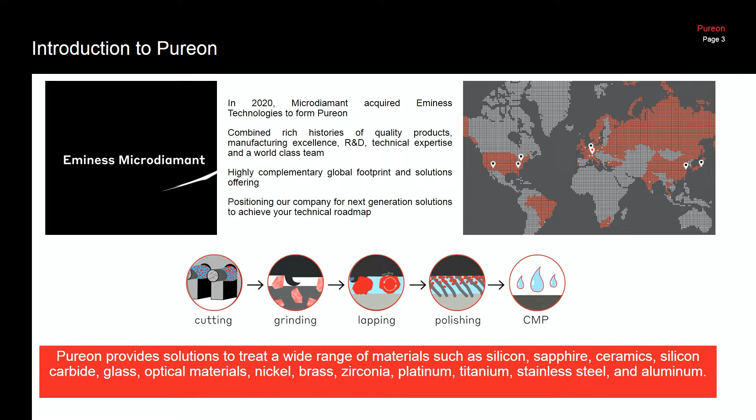So only one slide about us, who we are. Company Pureon is a merger of two companies, the company Microdiamant and the company Eminess. Microdiamant still is main manufacturer of diamond micron powder and especially the so-called polycrystalline micron diamond powder. And we are a manufacturer of the product that I want to talk about today, which is the Squadro. Looks like this. This is a diamond grinding wheel, tile, pad, however you want to call it.

Eminess is a very important part of our company today because they are the ones who have all these colloidal polishing materials and as well the pads, what you need as a support. We are covering many process steps. This means from cutting, sawing, wire sawing, as well grinding. We will speak about grinding today, but as well we are involved in lapping, polishing and CMP. So this is more the part of former Microdiamant, and this is covered by products from former Eminess.

And what is very important, because we are using diamond and all these chemicals, we can work on basically all materials that you can imagine. Why? Because diamond has the hardness, but as well the chemical composition and compatibility is there. So I want to speak about the glass only, but we can work on so many other materials which we see in the semiconductor industry. But okay, let me continue.

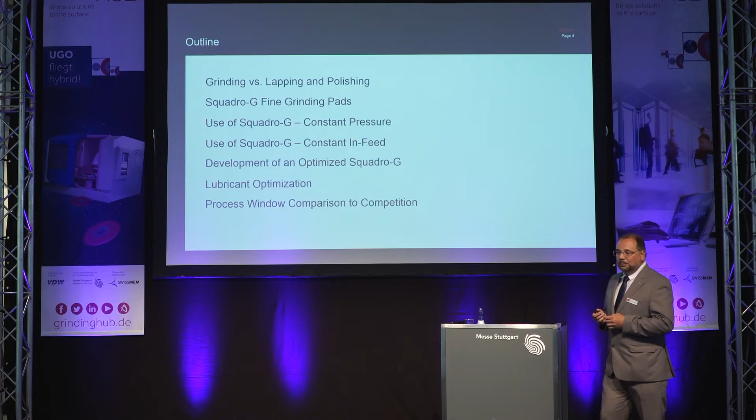So a brief outline about what I will talk today is some little theory. You know what is grinding and lapping, but I will briefly talk about it. And then about our product and how to use it under different conditions. Very interesting. And then we have some internal results that I want to share with you, these two parts, and in the end to show you what is the process window of the product.

So theory, grinding, you know, this is if you have a support where you have the abrasives fixed on it. Very simple. And the abrasive material can be anything like diamond or silicon carbide, aluminum oxide. It's fixed, that's important. And here for the lapping, you have loose abrasives. You can have rigid, stiff supports as well. This is a powerful process, but the particles get stuck into the support only in situ, just interim. The polishing is a bit different, but lapping and polishing are more close. Here you have, for example, a pad, a carrier, let's say woven pad, a Velcro, or maybe polyurethane pad that absorbs the particles, but it's again loose particles.

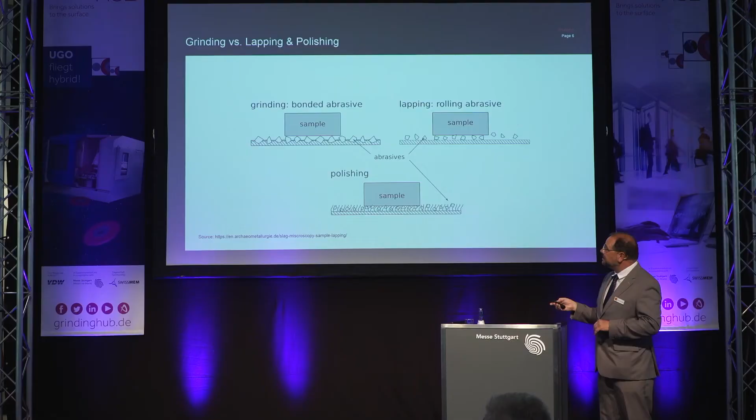Look a bit more closely into detail of grinding. Here you see something very important too, that our product has multiple layers of diamond, not only one. So this means we can wear it down, refresh it, dress it, use it constantly. And there are two main important aspects. How to use it best is the downforce, of course, so specific pressure on the workpiece, and as well the circumferential speed, grinding velocity, or platen speed, and we will see there are different speeds. It's not only one speed.

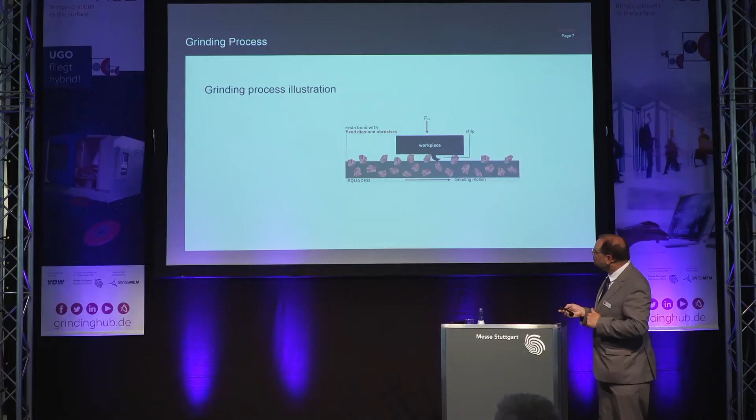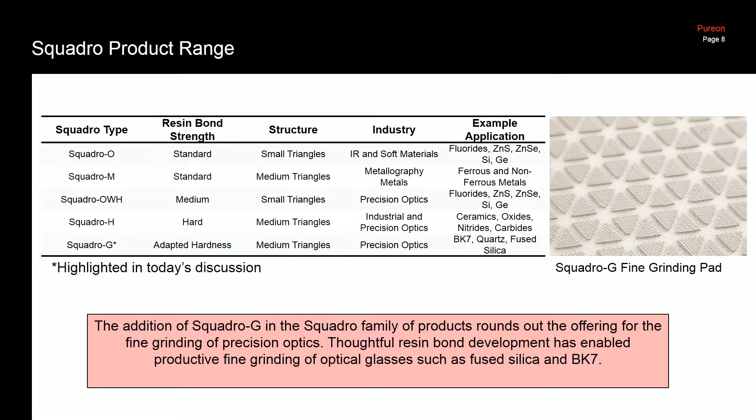Let me give a brief overview of this product family. So it's not only one product, but they are dedicated to specific applications. So we have a Squadro O, M, OWH, H, and today we will mainly speak about the Squadro G, but what is different? So the O stands for optical industries, where we work on softer materials, and we can use it on calcium fluoride, zinc selenide, zinc sulfide, and others, silicon, germanium. The M stands for metal. This means we use it for ferrous and non-ferrous materials, metals.

And you see the bond, these are the same, we say standard, but it's a rather soft bond, which enables a very gentle preparation. For these materials, it's very important to not be too powerful, to have the right level. For the optical industry, we have a specific setup where we go a bit stronger, depends on the size of the workpiece and the setting.

Because we are a manufacturer, we choose as well the design of the product. It can be small, large, and so fitting to the size of the workpiece, the size of the machine, diameter, and everything. The Squadro H stands for hard, because we have a very hard and powerful binder. This is for heavy-duty applications, typically for ceramics, oxides, nitrides, carbides, as well for the silicon carbide industry, but that's another story.

Today we speak about Squadro G, and this has some adapted hardness. This means as well very strong and powerful, but it's adjusted typically for glass applications, so that we take into consideration what the glass type is, that it works best. In the market we mainly see BK7 and quartz glass, fused silica.

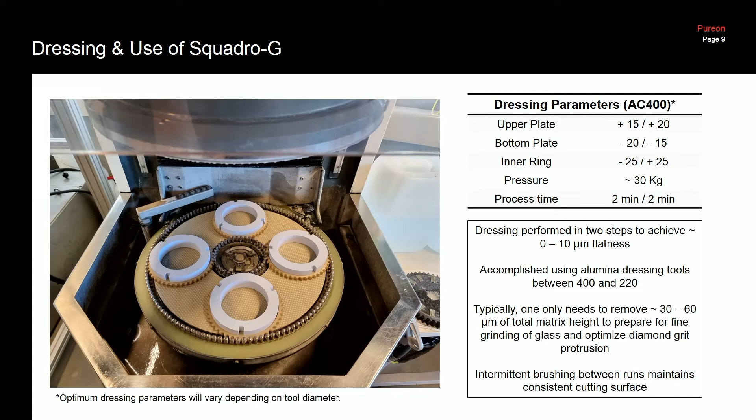And we do this by using aluminum oxide dressing stones, but we do it in a very, very gentle way. These are some numbers that we use. You have different plates, upper plate, bottom plate, and the sun gear, the inner ring. 30 kilograms means very little pressure, and 2 minutes is not too long. I spoke to other people who said it's very long, but that refers to diamond wheels, because we have another product with a resin bond. But still, all these values are low. This means we gently dress and open up the product.

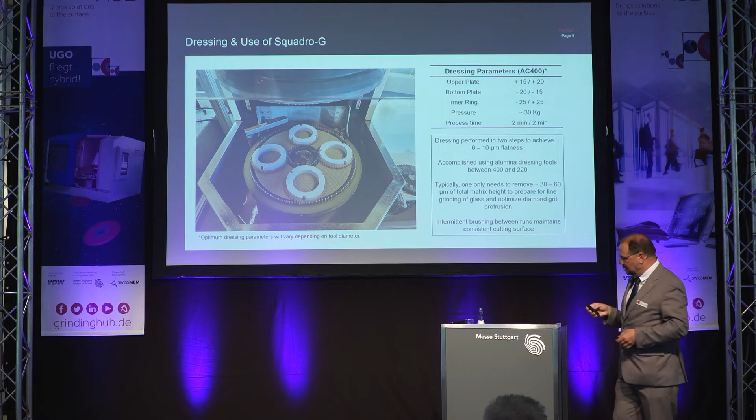And then we end up with a flatness and parallelism as well in the range of, let me say, 10 micron. You need to do this once to start with the product correctly. After that, you should not do it again and again, because then you would wear down the product. Then in between process cycles, do a gentle brushing. Just refresh it gently. That's enough.

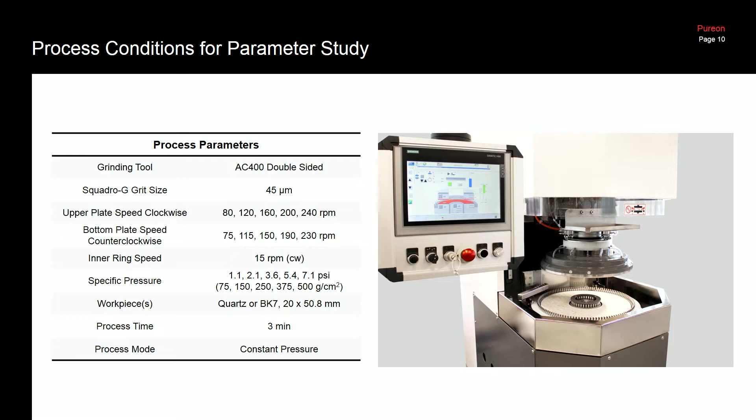For the study, now I'm coming more into techniques. These are the parameters that we use for the test. It was an AC400. We chose a grit size of 45 micron. So you have your bond, and the particles are protruded just a bit, about 20%. This means we do not have loose abrasive, but fixed. So the protrusion is about 20%, meaning 8 or 10 micron that the diamond is looking out of the bond.

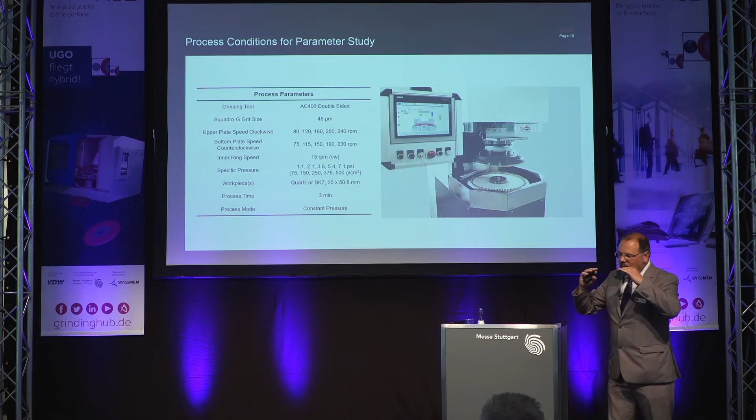And why? This is a surface quality level which we can get on different kinds of glasses that allows you to do the finishing with cerium oxide products afterwards. So that's the fine grinding where we hand over to the polishing. You see 5 values for the speeds and so on. The starting point is the second value each, because we often see this in literature as a reference or from competition products. Then we went one value lower, but then higher, to see where we are, how we may compete with other products.

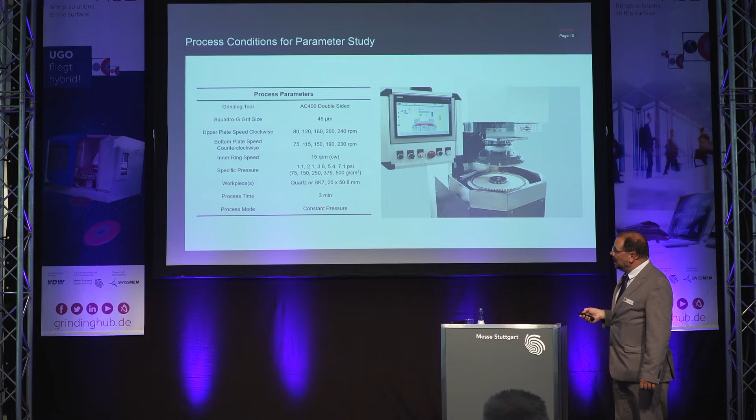The load is little, so we do not press too hard, because we do not want to break the glass. Again, we work on quartz and BK7. These are 2-inch wafers, short process time, and constant pressure. We have other situations coming later. So these are the first results.

Here we work on BK7, and on this axis you see MRR, material removal rate in micron per minute, how much we remove from the glass. Here we are increasing the speed, and on this axis you see the surface result in terms of roughness average, the Ra value. Many people know this. If we increase the speed, it's somehow obvious, because you have more passages, the material removal rate per minute increases. It's nothing dramatic, but it's important. But very important, the surface quality is not affected. It gets even a bit better. This means we can choose, according to machine requirements and features, the best platen speed.

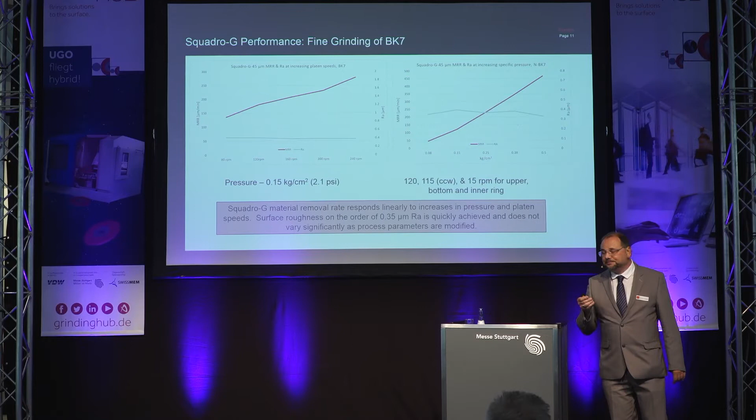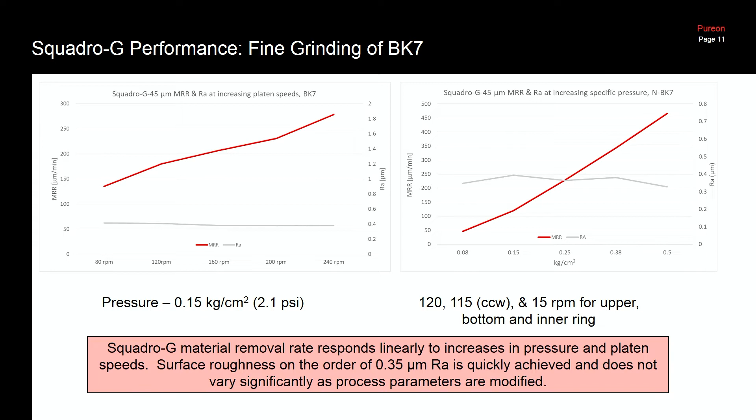Same here. Here we fixed platen speeds, but we increase the pressure. The result basically is similar, we see an increase. The more we press, we can increase removal significantly, as you see. This is almost 9 times, so it's really powerful. But again, the Ra value is almost constant; the axis here is a bit different, but the result for both is about 0.35 micron, and again, that is the level from which you can continue to chemical polishing.

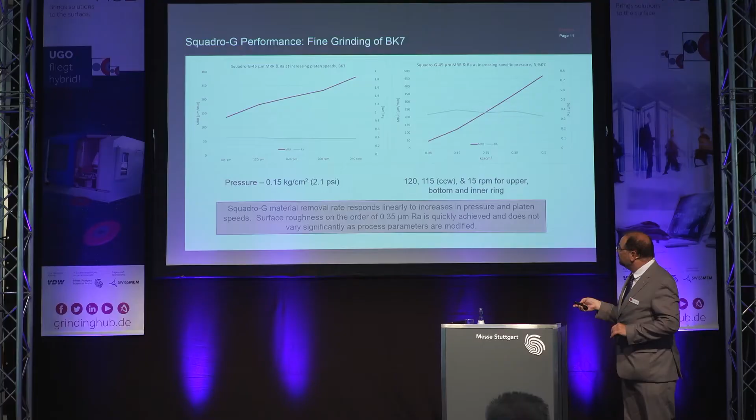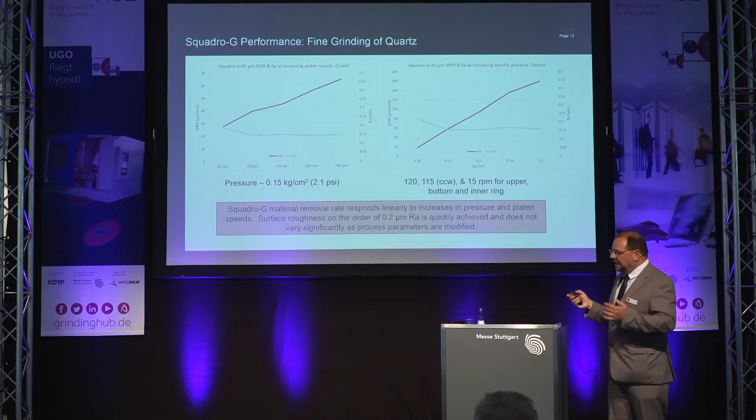The very same is true if we use quartz, and basically we find this on all other materials that we use. If you go on a silicon carbide or other ceramic, we see the same. This means increasing speed, we increase the removal rate almost linearly while keeping the surface quality really constant. Same here with the pressure. And on quartz, because it's a harder material than the BK7 we had before, the absolute value of Ra is just on another level, means finer, because you dig less deep into the material.

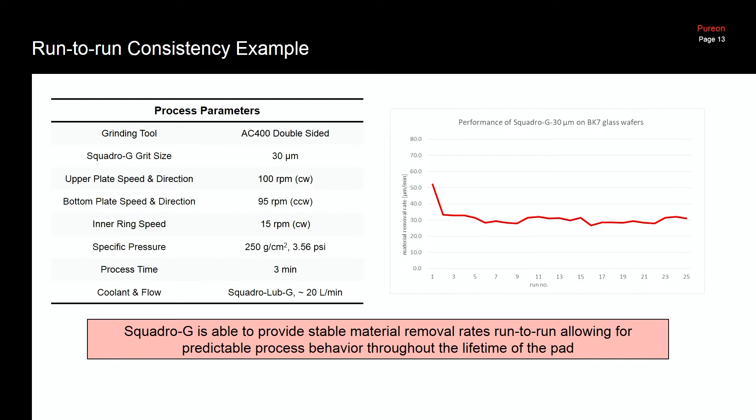You might say, okay, you can do this once, but I have mass production. Yes, very important. It's for mass production. So how can we repeat it? Can we be sure that we do that? If you have a grinding tool, you have your chips, breaking the chip, and you have that swarf that fills up the product. So we have protrusion of the diamond, and we load the product with swarf. We need to really keep it open, and this can be done by choice of appropriate platen speeds and parameters, but you need a certain level of pressure to break the chip, as you mentioned just before. That is very important, so that you keep it open, you keep it running, you keep it going.

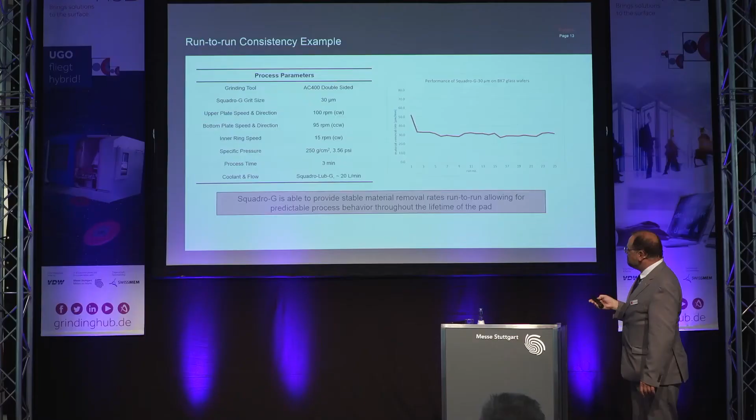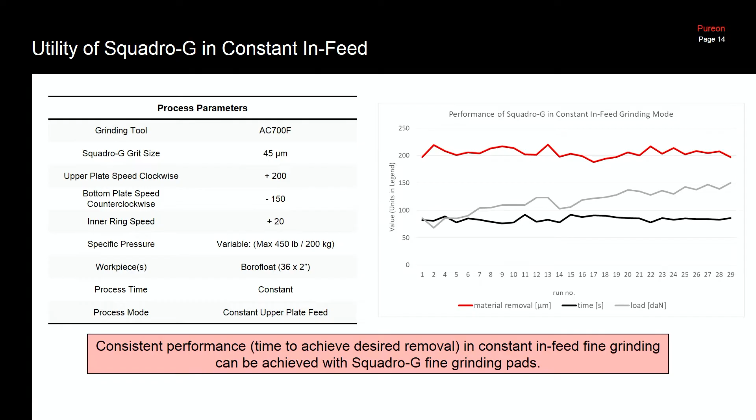And this one is a very, very clever system. Here we used, again, an AC from Lapmaster Wolters, AC700F. And this one now does not apply constant pressure, but constant platen feed. This means it moves forward and removes as you set it. And for mass production, you want to always have the same time. So what the machine does, it regulates pressure. It alters the pressure. So you break the chip and then release a bit. And so over time, the pressure or load of the machine increases a bit. That is as well due to the wear of the product as such. There is some wear, sure.

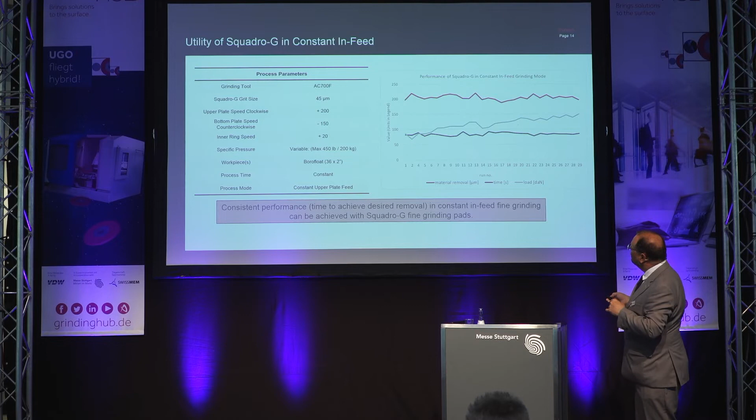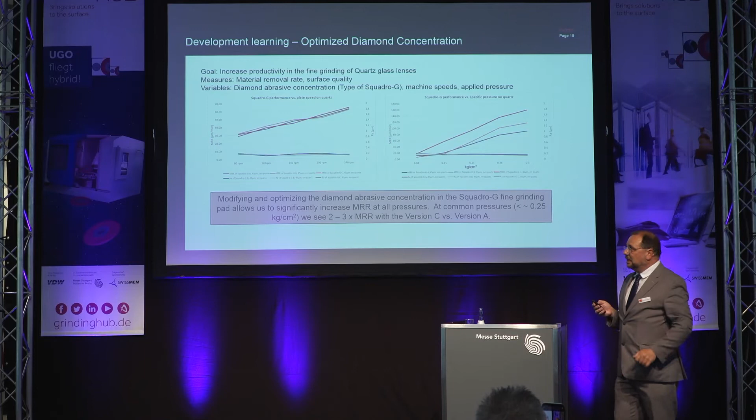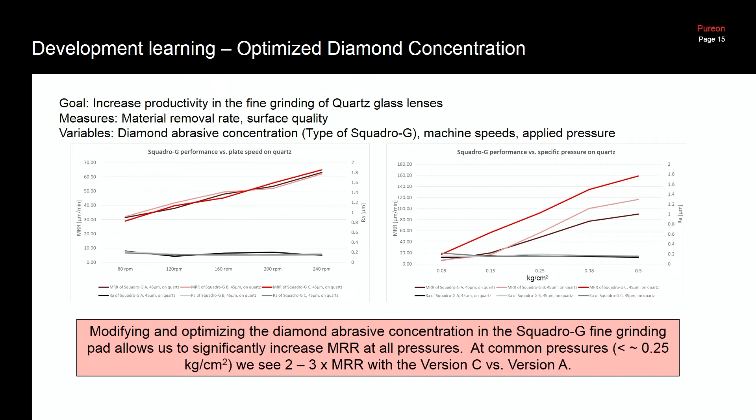So now these are some internal results. We are showing this to show what the capabilities are, what we can do. Internally we asked ourselves what would happen. So you see Squadro G, Squadro G, Squadro G. Same product, but with different concentrations. Do you think, okay, more diamond can help, or is it difficult to really make it work? What does it do, depending on material and parameters? So if we increase speed and we have more diamonds, A has low diamond concentration, B medium diamond concentration, C high diamond concentration. All the same results. Again here, the Ra value does not alter. That's very important. Whatever we do here, no change.

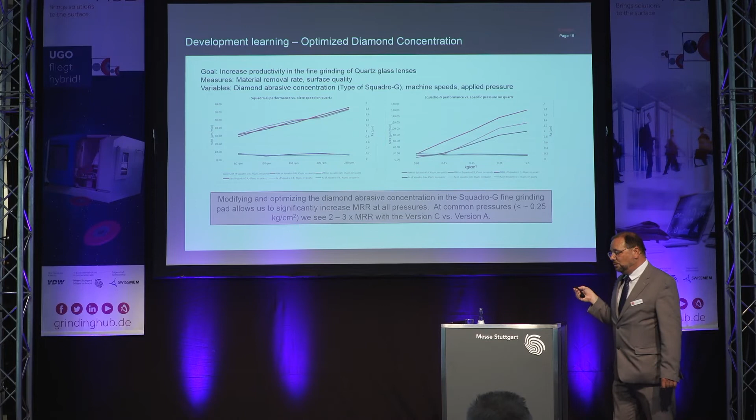But if we move to this slide, if we increase pressure, then you see a big difference. From here to here, you can almost double the performance. Why? How can we understand this? It means if you have more particles, you need to have the appropriate specific pressure on the workpiece. So if you want to benefit from this high diamond concentration, you need to be capable to apply that pressure. Otherwise it doesn't make sense. But we are capable to do so.

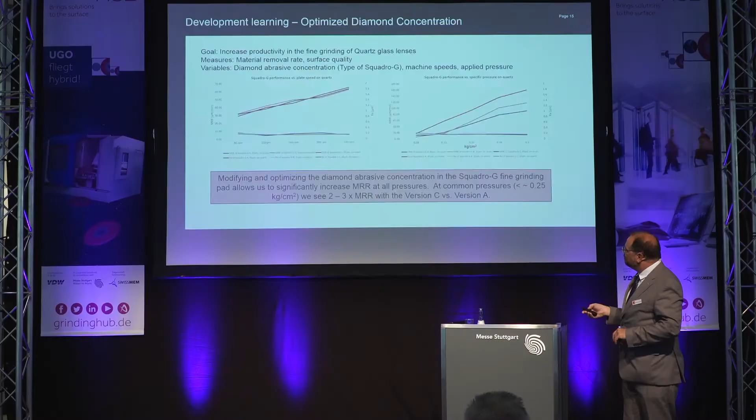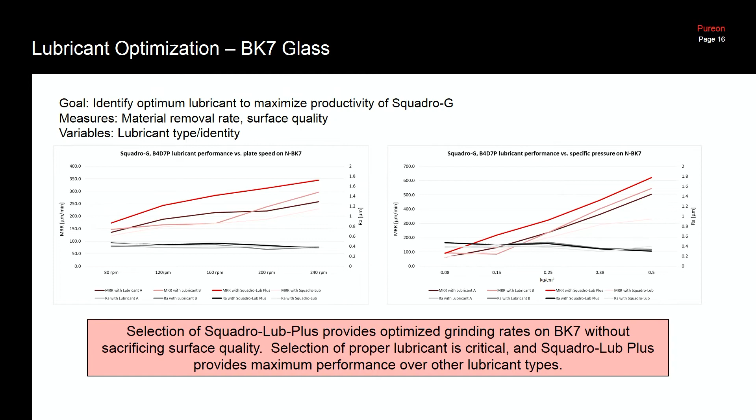Another very important thing is the lubricant. I was mentioning swarf and keeping the product open. I said we need to have protrusion of the diamond, but the product gets loaded by swarf, so we need to remove it. So here we speak about surface tension, how to wet, so that the swarf does not get clogged or clustered. We started with this one, the pale line, a specific lubricant, but the performance is low. During our developments, we could create a new lubricant that fits the product very well, and the other two lines are competition products. So there's a big gap.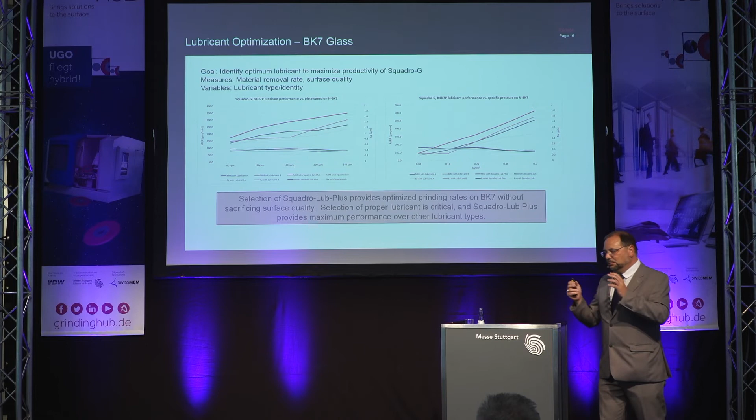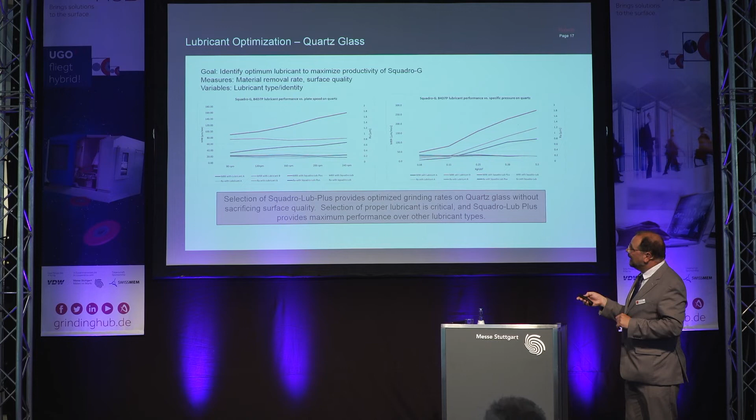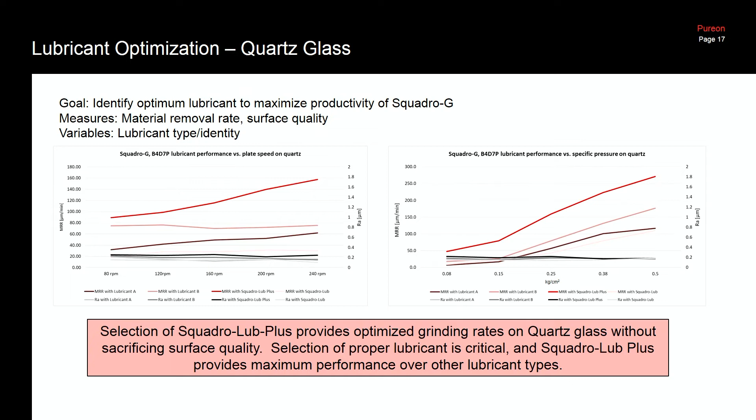So the lubricant with all the parameters is very important. We see here as well that we could significantly improve. This means you need a combination of the grinding product and the lubricant. Same here again on the quartz. We see that the new lubricant fits much better. And just to mention again, the surface quality never alters because the product is very consistent, very stable. Same here. Okay, I continue.

Now, how do we position ourselves with respect to the competition? We have the material removal rate of a competition product, with respect to different parameters. So this one. The black line is the removal rate of a competition product. You might say we are cheating. No, we do not.

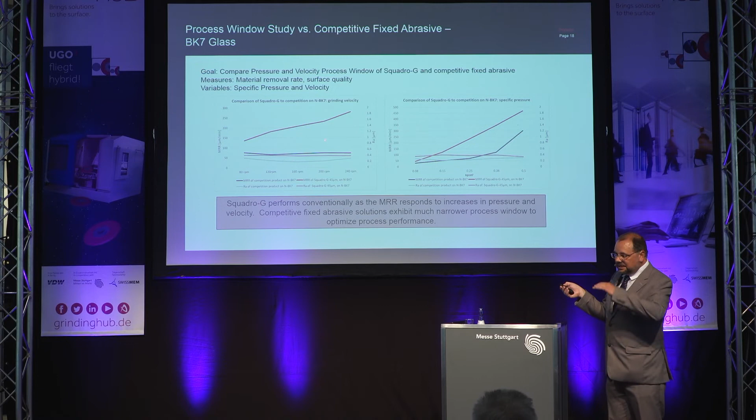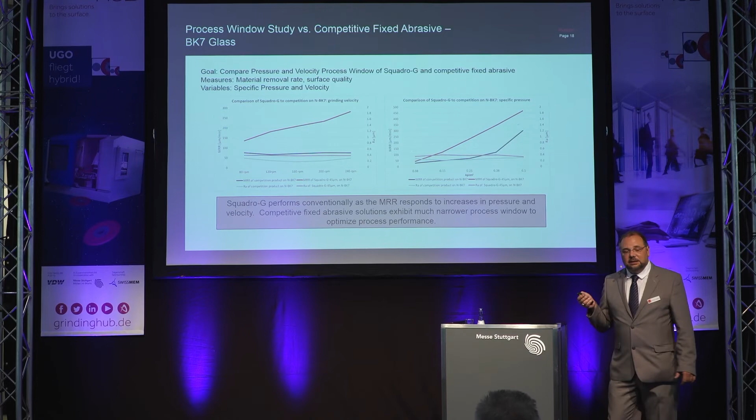This product remains very consistent over the rotation speed, while, as we have seen before, we increase. This product is designed in a different way. Many of you probably know this. So you can have a product with protrusion or one that is designed in a different way. I do not say more about this, but that is a very well-known product in the market.

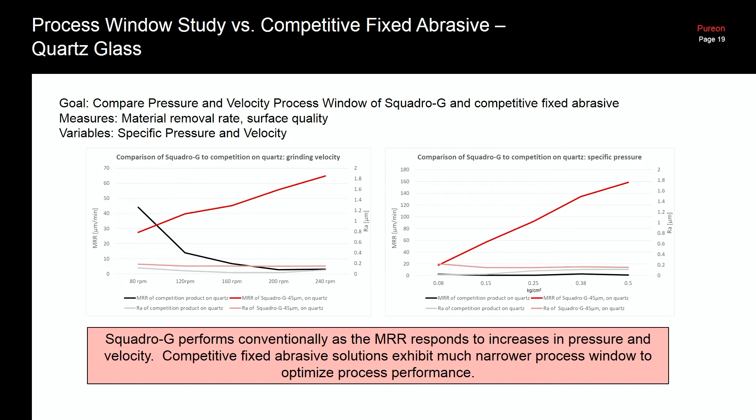So where you cannot alter, only if you apply pressure it moves a bit, while we can have that increase. It's even more dramatic on the next slide, where this becomes less because it's not open. So, not speaking about competition but about our product, we can increase the performance, while with other products it's a bit different. So our product is a new solution in the market so that you can benefit from that new approach.

So already a summary. We have seen different Squadro products. The Squadro G now positions itself well in the market as a complementary product in respect to ceramic grinding, metal grinding, and so on. I didn't mention it in much detail, but we have it in many grit sizes. Depending on the glass type, we have seen tests with the 45 micron and the 30 micron, but we have other grit sizes so that you can choose the level of your performance.

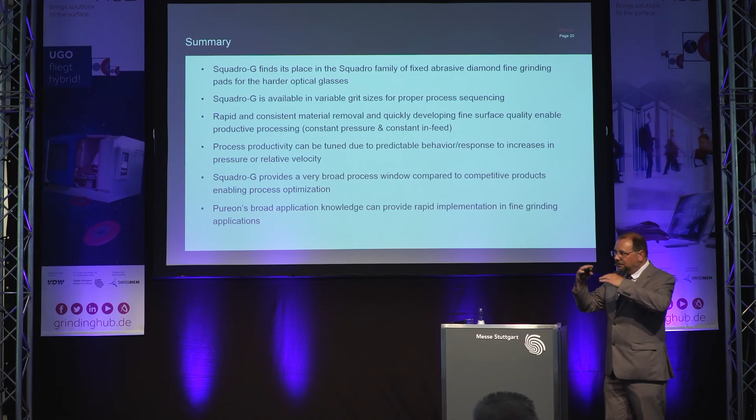Instantly, because of the production, the product starts to work and you get your surface quality right away. And if you continue grinding, you just wear down, but your surface quality is always the same. And the productivity can be tuned, as I tried to outline. Choosing the parameters depending on the friability of the workpieces, you may need to throttle the process a bit, but you will always see a good process window, and it's a very broad process window. And if there's any question, we are ready to support you to apply the product in the best way.